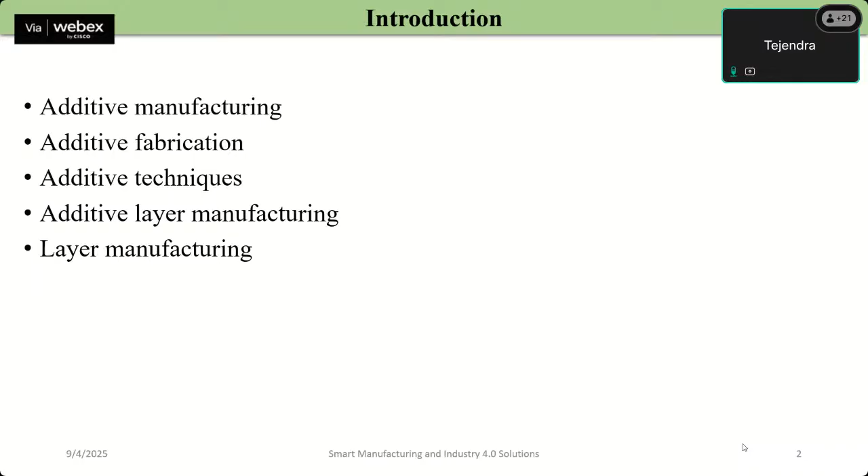Whether we talk about additive manufacturing, additive fabrication, additive techniques, additive layer manufacturing, free form fabrication, rapid prototyping, or 3D printing, these are all different names for the process with a similar principle of operation. Additive manufacturing is a computer-controlled process that creates a three-dimensional object by depositing material, usually layer over layer.

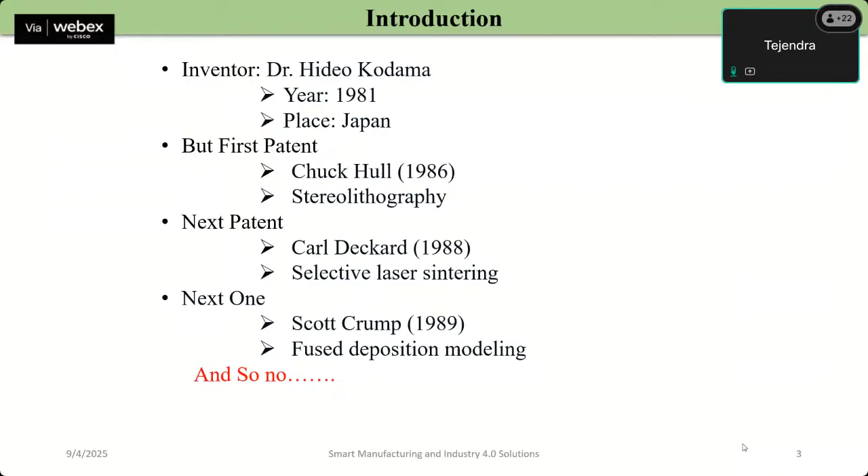A brief introduction about MAM, or metal additive manufacturing. It was first used in 1981 by Dr. Hideo, who is named as the inventor of the process, but the first patent was done by Chuck Hull in 1986 on stereolithography. The next patent was for selective laser sintering by Carl Deckard, and so on.

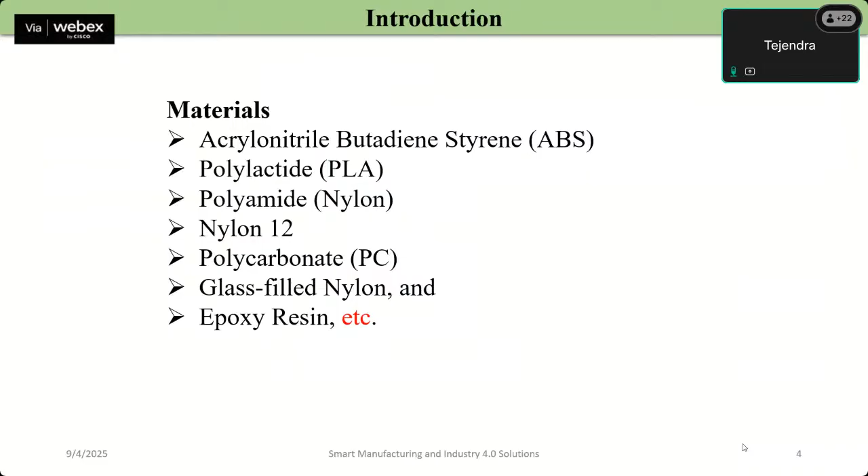When we talk about basic additive manufacturing techniques, the first thing that comes to mind is the material. Most of the material is polymer based, so the material could be ABS, PLA, nylon, epoxy, or resins. Different processes use different types of material, but mainly all the material is nylon based or polymer based.

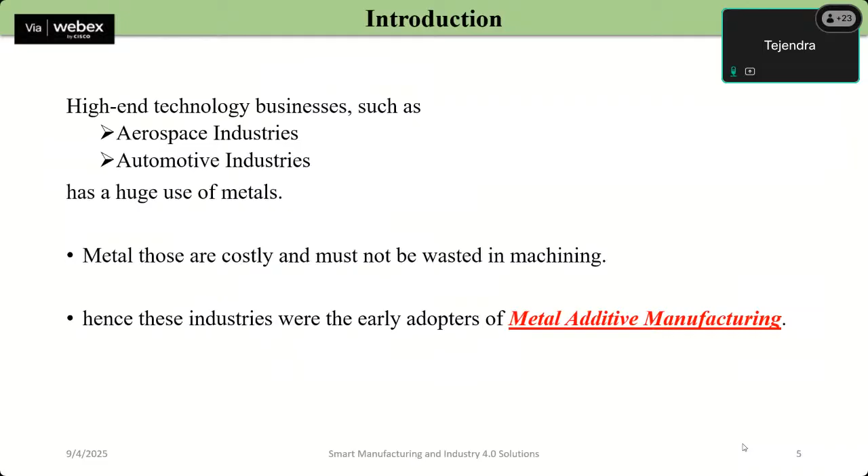But as we talk about mechanical industries, high-end technology businesses, whether the automobile sector or the aerospace sector, these use a large amount of metal. So it is not right to use additive manufacturing only for polymers, as these metals used by aerospace, marine, energy, or automotive industries are costly and must not be wasted in machining or subtractive manufacturing. Hence, these industries were the early adopters of metal additive manufacturing.

Basically, metal additive manufacturing uses metals to create a layer-by-layer object. The production of the consolidated part can be done with reduced labor or weight. Overall, a more efficient part with increased complexity can be made, a part that is not supposed to be made, or is very hard to make, with subtractive manufacturing. The consistency and repeatability are advantages of additive manufacturing processes.

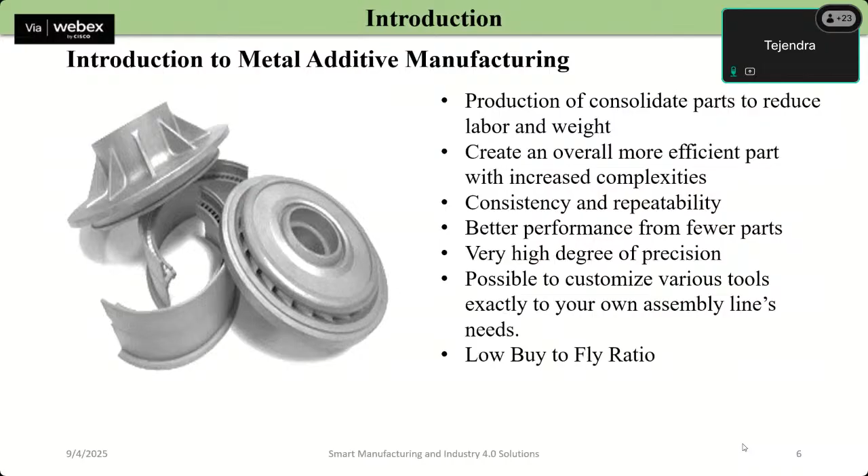Whether we talk about metal or polymer, there is better performance with fewer parts. We can develop an object or a product with a fewer number of parts. A very high degree of precision can be gotten from additive manufacturing, and also a low buy-to-fly ratio. So for my presentation, I have classified the metal additive manufacturing process into two types.

The beam based process and the arc based process. In the beam based process, the heat sources are the laser or the electron beam, while in the arc based process, the arc is the main source of heat, either from the GMAW process, GTAW process, or plasma process. The feedstock used in beam based processes is wire as well as powder, while the arc based process uses only wire as its feedstock.

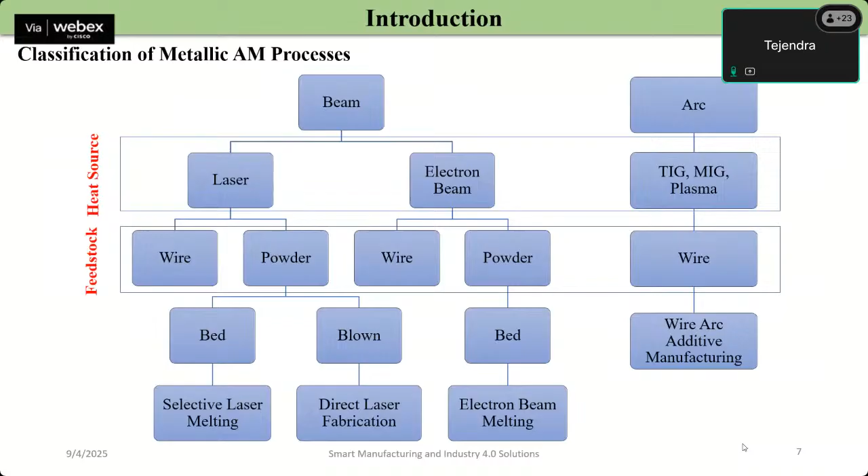Best near net shape can be availed among all the other additive manufacturing processes, and above all, workpiece properties like reflection or absorption do not create any problem.

But there is some disadvantage also, as the electron beam additive manufacturing process needs a vacuum chamber, as a vacuum is needed for the traveling of the electron. So the vacuum chamber cost is quite high and the product size could be limited because of the size of the vacuum chamber.

It has a lower setup cost compared to the electron beam additive manufacturing process, and no size limit, because there is no vacuum chamber required. The work area can be as big as the movement of the robot arm or the laser beam. But it also has some disadvantages, like a low deposition rate.

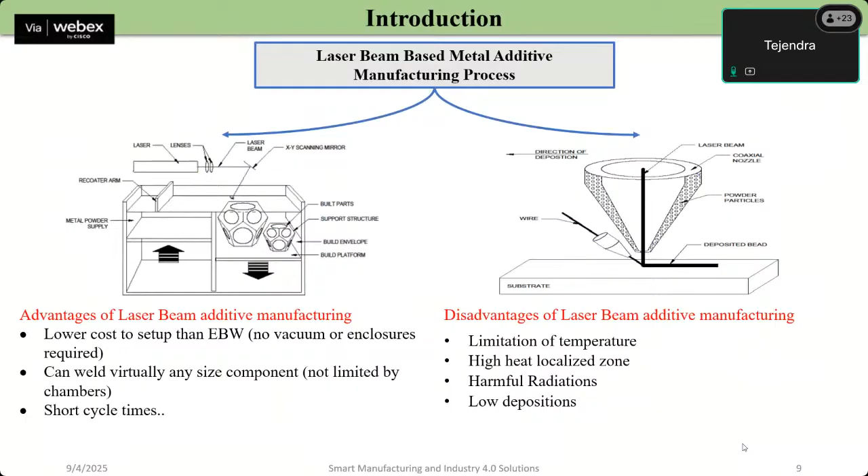So the heat of the electrical arc serves to locally melt the base material as well as to melt the wire filler metal that is being fed into the weld.

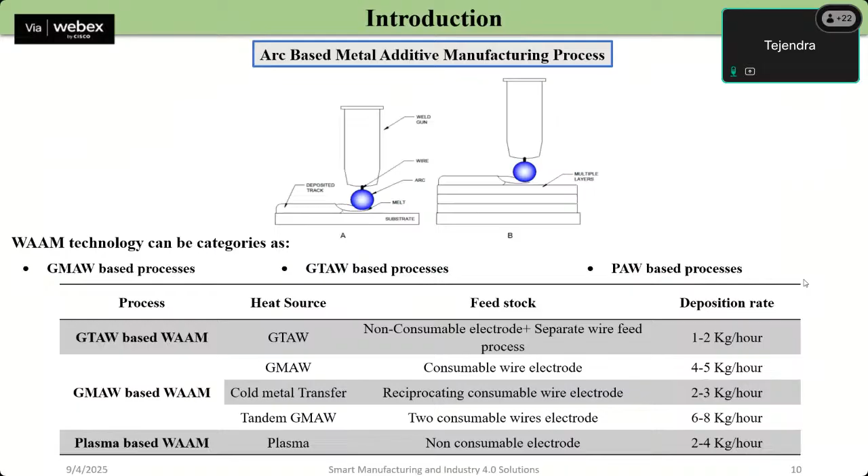Coming back to our topic of sustainability in wire arc additive manufacturing. In this slide, we are going to study sustainability and how it affects or creates any difference in the wire arc additive manufacturing process.

As we know, manufacturing has always been judged on the basis of cost, quality, or productivity. But nowadays, in the present scenario, the fourth dimension, sustainability, has become equally important, as industries worldwide are under pressure to reduce carbon emissions generated in their processes, to conserve resources, or to adopt greener processes.

So WAAM, which is an additive manufacturing process based upon arc welding, is attracting attention not only because it is able to make large or complex parts, but also because it has the potential to make manufacturing more sustainable.

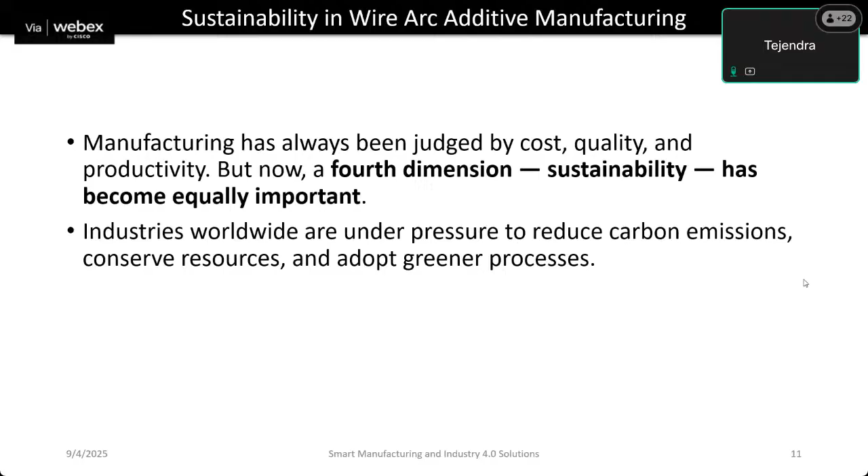We will explore how WAM helps in material saving, energy efficiency, repair or recycling of damaged products, and how we can reduce environmental impact. We will also look at its challenges and innovations in this lecture, so we can make it more sustainable. By the end of the session, I hope you will all be able to see WAM not just as a manufacturing technology, but as a contributor to the global push for sustainability.

Before we dive into WAM, let us understand what sustainability is. The most widely accepted definition of sustainability is: meeting the needs of the present without compromising the ability of future generations to meet their own needs.

Sustainability rests on three pillars: environmental sustainability, economic sustainability, and social sustainability. For environmental sustainability, the resources we obtain from the environment, and the adverse output we provide to the environment, can be considered, like reducing material waste, lowering emissions, saving energy, or conserving natural resources.

Apart from the environment, economic sustainability is also a part of sustainability, as here we need to ensure that the process remains cost effective as well as competitive while being eco friendly. We cannot compromise with harmful or damageable things if we are having some profit in the monetary form.

The third pillar of sustainability is social sustainability, through which we can create safe or meaningful jobs or opportunities for people, so that society can get benefited with the technology. We need to ensure that social sustainability should be there when economic sustainability is there, but because of these two, we should not hamper or compromise with environmental sustainability. So this is the basic introduction of sustainability.

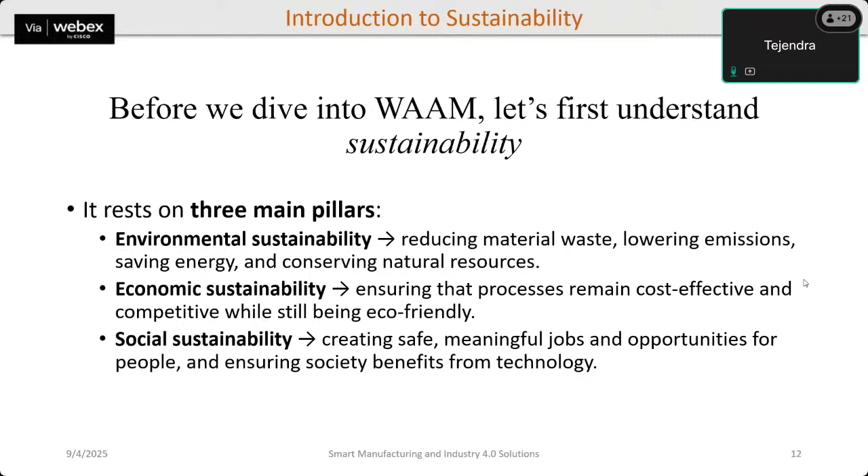So our next slide shows additive manufacturing and sustainability, how additive manufacturing can be sustainable, or what steps we can take to make our additive manufacturing process sustainable.

Unlike subtractive manufacturing, where we cut material away from a bulk or large block, additive manufacturing builds parts layer by layer. This approach immediately improves sustainability because it uses only the material that is needed, resulting in less material use and less waste, as well as enabling lightweight or optimized designs which are not possible with conventional machining.

For example, if we take the case of the aerospace industry, lighter components mean less fuel will be consumed and lower emissions will be there.

Apart from lightweight or optimized design, another key advantage is repair and remanufacturing. With additive manufacturing, instead of discarding a damaged part, we can add material back where it is needed, extending the life of the component, as well as reducing the need for new raw material extraction from the earth.

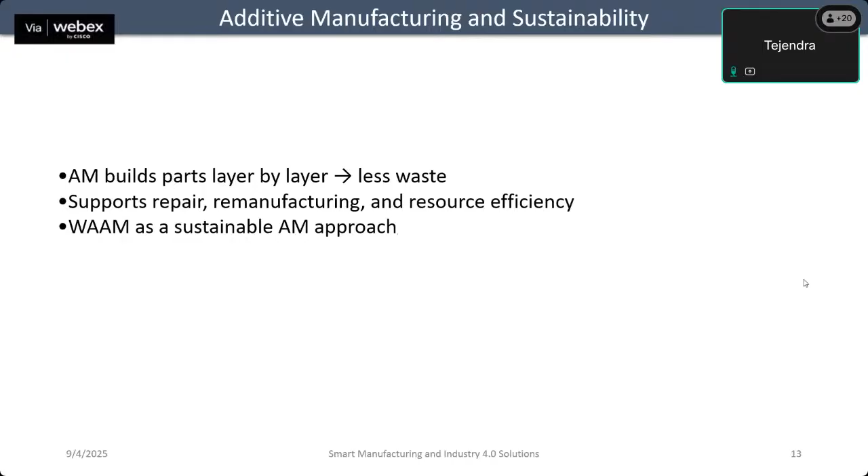So when we proceed further in our presentation, how does WAM connect to sustainability? There are five main dimensions that we need to analyze when we are analyzing sustainability in WAM. The first one is material efficiency.

WAAM uses the wire feedstock with almost no waste. Unlike machining, where most of the material ends up as chip, WAM deposits only what is required and where it is required.

The second dimension could be energy efficiency. WAM consumes less energy than laser or electron beam additive manufacturing processes, since it does not require a vacuum chamber or extremely high power lasers.

The life cycle impact is also a dimension for sustainability in WAM, as one of the biggest sustainable advantages is that WAM can be used for repair and remanufacturing. Hence, instead of throwing away a worn or damaged part, we can rebuild the damaged area and extend its life cycle, generating a good impact on the environment because we are reducing waste as well as reducing the extraction of new raw material from the earth.

The environmental benefits are also there, like reduced CO2 emissions and less transportation, because WAM can be done near the point of use where we are going to use the product. As well, less waste contributes to a smaller carbon footprint, since generating less waste means a smaller amount of waste is created for the environment.

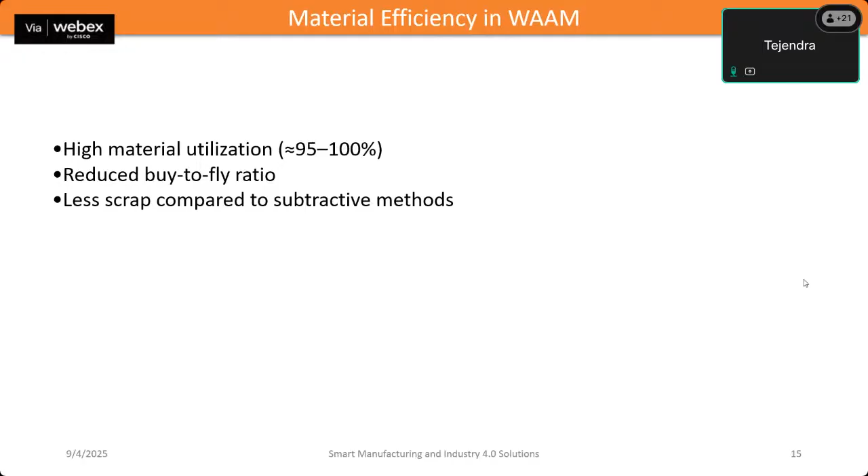Apart from material efficiency, another thing we need to discuss is energy efficiency in WAAM. Many additive manufacturing processes, like laser powder bed fusion or electron beam based additive manufacturing, require very high energy beams and also need special environments like vacuum chambers or controlled atmosphere.

These setups also consume a lot of electricity, not only for melting but also for maintaining the operating conditions, like the vacuum chamber or controlled environment. WAAM, in contrast, uses a conventional arc welding power source that does not require much energy compared to other processes. The energy requirement is significantly low.

There is no need for a large vacuum chamber, expensive laser optics, or different types of controlled environments. For example, if we compare production of the same large titanium part by machining versus VAM, machining not only wastes material but also consumes high energy for cutting and cooling, while VAM deposits only the required material and consumes less power overall, making it a far more energy efficient system.

So in terms of sustainability, VAM reduces the carbon footprint per part by consuming less energy and enabling a near-net-shape manufacturing process.

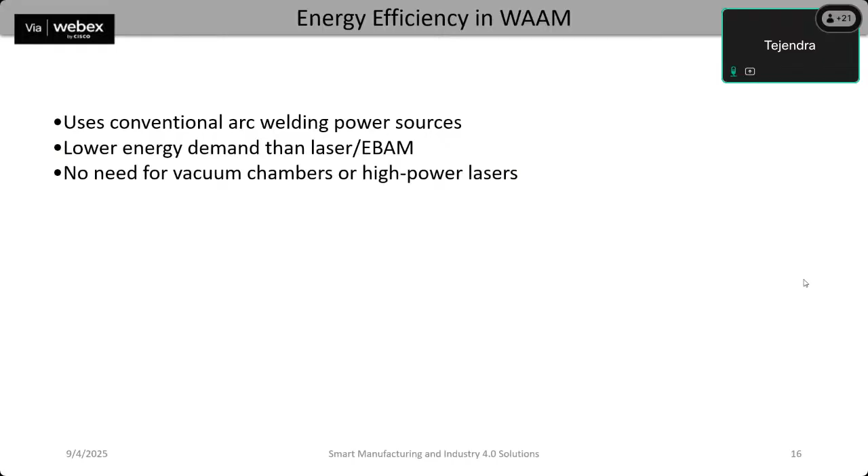When we talk about energy efficiency and the recycling or remanufacturing of the product, the life cycle impact of WAAM should also be considered, as this is another critical sustainability dimension which impacts the product life cycle.

In conventional industries, most of the industries in India still use conventional technology to prepare parts or manufacture components. When a part is damaged or worn out, it is usually scrapped or replaced with a new one. That means more raw material has to be mined and processed, transportation of material is needed, and the manufacturing or casting process adds further steps, all of which increase the environmental impact.

When we compare WAAM to conventional or subtractive manufacturing processes, VAM provides a better alternative. It can be used for repair and remanufacturing instead of discarding a damaged part. VAM allows us to add new material only where it is needed.

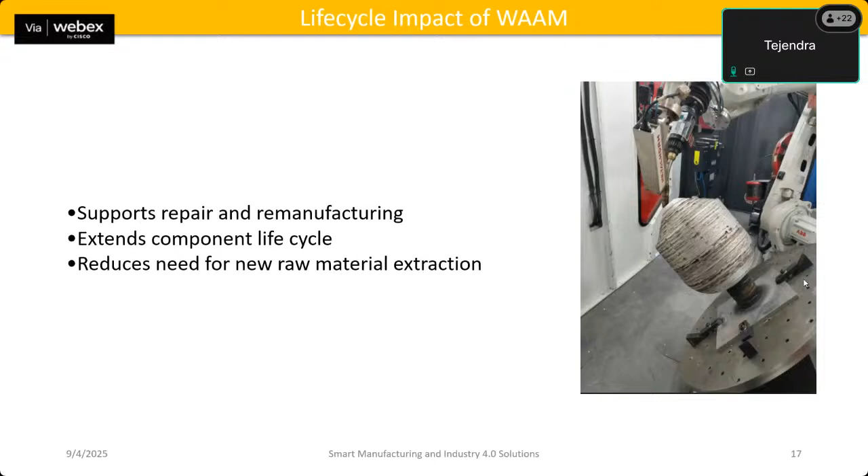So when we talk about material efficiency, energy efficiency, and repair and remanufacturing so that new raw material can be saved, what type of environmental benefits can WAAM provide us?

First, because WAAM uses a near-net shape manufacturing process with very little waste, the overall carbon footprint per part is reduced. If we waste less material, it also means less energy is spent on mining, refining, or recycling.

Secondly, WAAM enables localized production. Imagine you are on an offshore oil rig or in a remote defense base, somewhere in Kargil or Bikaner, where it is very difficult to transport large spare parts. Parts are expensive, and transportation is also expensive and creates a huge carbon footprint by using diesel or petrol in vehicles.

With WAAM, you can carry the wire feedstock and a portable WAAM system and produce a part on site. This reduces the logistics and emissions from transportation.

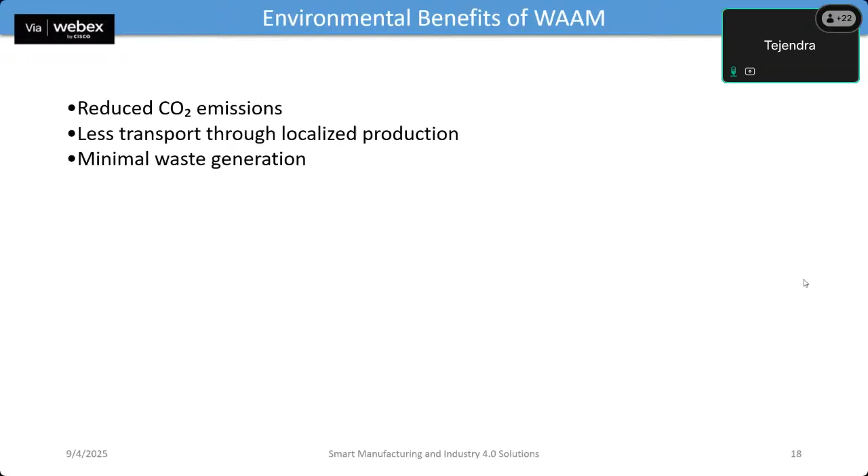Also, WAAM generates minimum waste as compared to machining. With traditional subtractive manufacturing, a large percentage of material ends up as chips, which need further recycling, so WAAM almost eliminates this problem. I'm not saying WAAM is 100% accurate, but the need for post-processing is only very little.

Now let's look at the economic impact of WAAM, which is closely linked to sustainability. First, WAAM offers low cost production because of its high material utilization. Almost all the wire fed into the process becomes part of the component. That is a huge cost saving compared to machining, where expensive materials like titanium or Inconel can have up to 80 to 90% wastage.

Second, WAAM enables shorter lead time. Traditional manufacturing of large metal parts often requires casting, forging, or extensive machining, all these different processes together, which can take months. WAAM builds the part layer by layer directly from a CAD model, cutting down the production time or the dwell time.

Also, WAAM supports localized production, meaning the part can be built close to where it is needed. This reduces dependency on the global supply chain, avoids long shipping delays, and even creates new job opportunities in local workshops and repair systems.

So economically speaking, WAAM is not only cheaper but also faster and more resilient, all while supporting sustainable development.

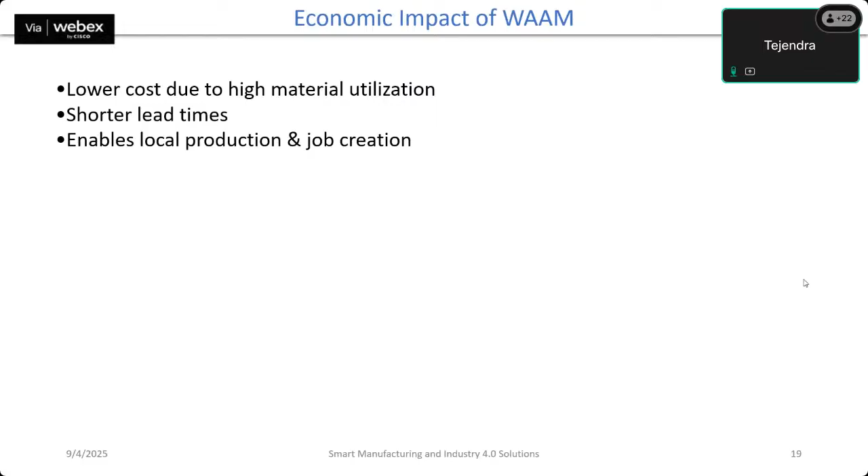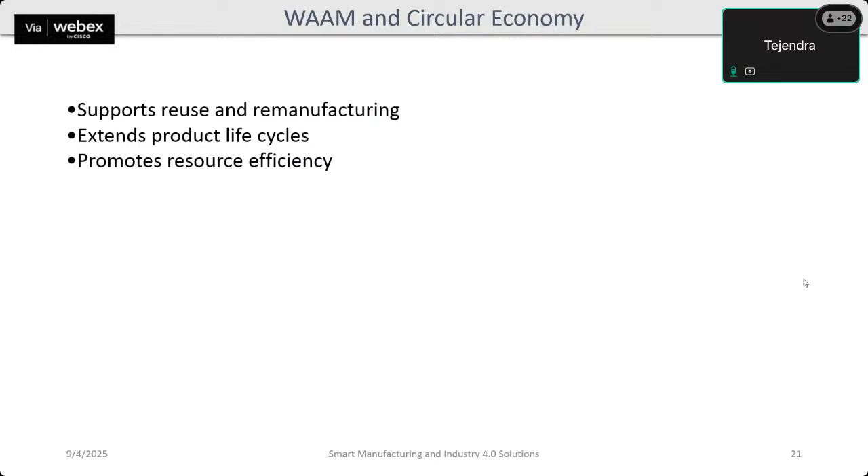Up to now we have focused on the sustainability advantages of WAAM, but it's also important to look at the challenges that still need to be solved, like high heat input. Since WAAM is based on arc welding and the process generates a lot of heat, this can lead to residual stresses, distortion, or defects in the build part. That means extra machining or heat treatment may be required, which consumes more energy and reduces sustainability.

Another challenge could be surface finish. WAAM parts typically have a rough surface and large layer height, meaning post-processing like machining, grinding, or polishing is necessary to achieve the required finish and tolerance. Again, this adds cost and energy consumption to the process.

Energy efficiency depends upon process control. If the process is not optimized, for example with the wrong deposition pattern or too many reruns, energy efficiency can be lost. Proper monitoring and control are very essential.

The last challenge is limited automation and monitoring. Unlike laser bed additive manufacturing, WAAM still lacks widespread adoption of advanced sensors, AI, or closed loop control systems. Without these, the sustainable potential cannot be fully realized.

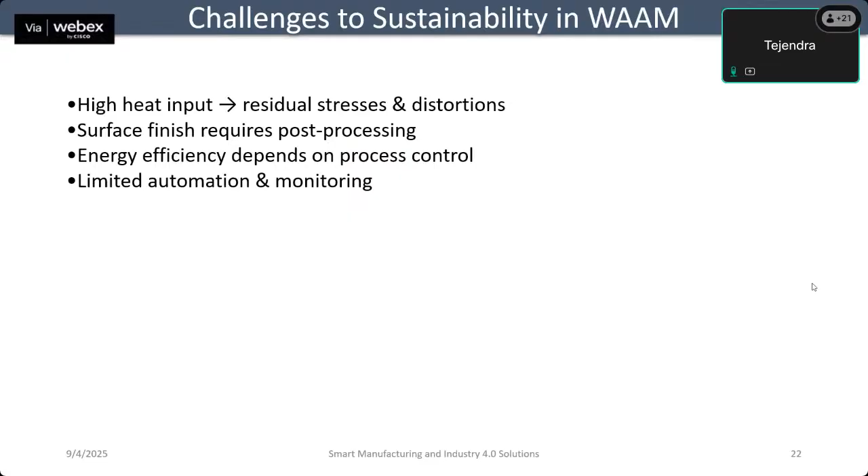To overcome the challenges discussed previously, researchers and industries are working on advancements to make WAAM more sustainable. This includes process monitoring or closed loop control. With different types of sensors and cameras, such as thermal imaging or high speed cameras, or AI based control, the WAAM can adjust parameters in real time to maintain stable deposition, reduce defects, and save both material and energy.

Hybrid WAAM and machining systems can also be used. Instead of doing all the machining after the part is fully built, some machine tools can combine with the WAAM in the same setup. This way, the part is machined immediately after deposition, improving accuracy and reducing extra post processing time.

Wire preheating or advanced torch design can be used, including water cooled torches or preheated wire, which improves efficiency by reducing heat input problems, stabilizing the arc, and enhancing deposition quality. This directly reduces energy consumption and improves material properties.

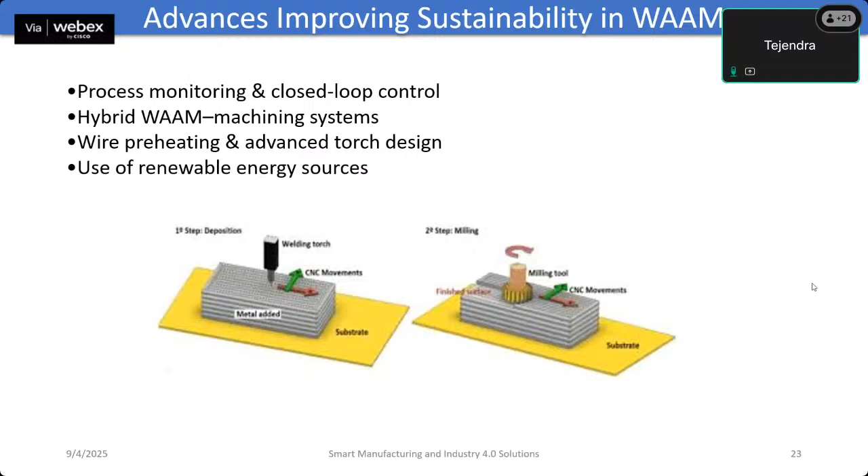We are taking an example of aerospace. Aerospace companies are under huge pressure to meet sustainability and net zero emission goals, and WAAM plays a key role in helping them achieve lighter aircraft. WAAM enables near to net shape and optimized design, meaning less material is used and overall aircraft weight is reduced. A lighter plane consumes less fuel, producing fewer CO2 emissions over its lifetime.

Also, reducing titanium waste, as titanium material is used in very large quantities in the aerospace domain. Machining of titanium parts can waste up to 80 to 90% of the block material, as we initially discussed. WAAM uses almost 100% of the wire feedstock, saving both cost and energy in raw material production.

Also, WAAM allows aerospace companies to print parts when and where they are needed. This shortens supply chains, reduces transport related emissions, and cuts down storage costs.

By reducing material waste, improving energy efficiency, and lowering emissions, WAAM aligns with the net zero roadmap of aerospace giants like Airbus, Boeing, or Rolls Royce. So WAAM is not just a manufacturing technique; it becomes a strategic tool for aerospace industries to achieve their long-term sustainability targets.

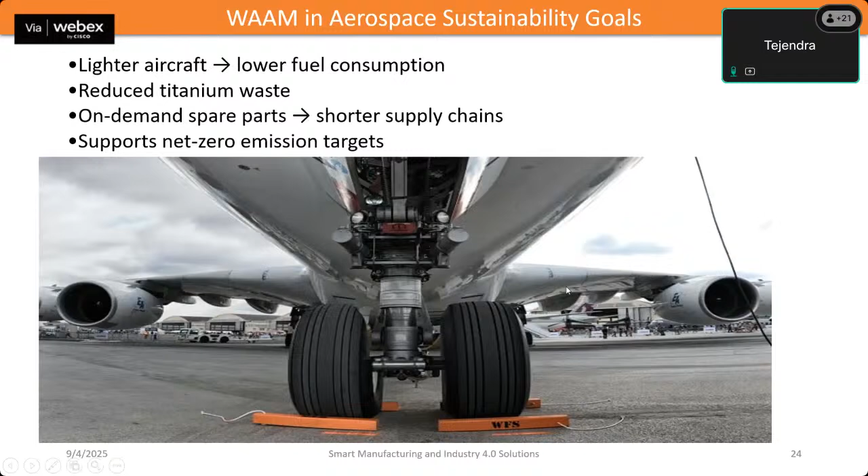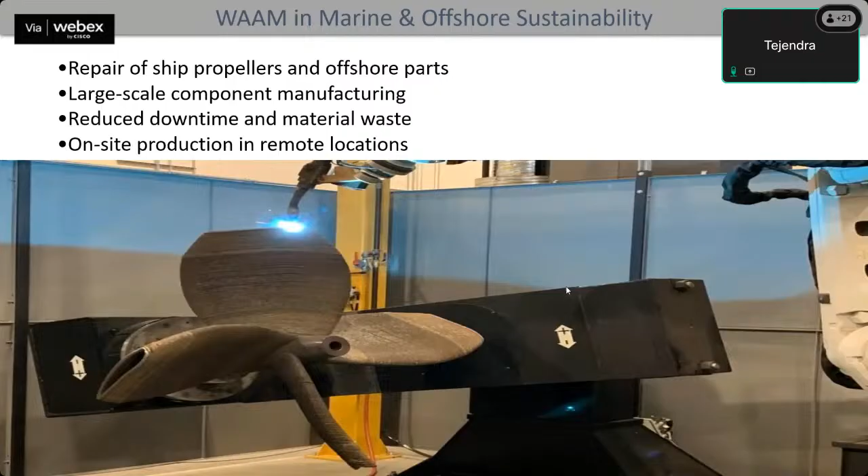It also reduces downtime and material waste. For example, if a ship has a damaged propeller, instead of waiting for a replacement, we can repair the propeller with the help of WAAM. On-site production can help in oil rigs, marine repair yards, or various defense bases, where a portable WAAM system could be used to build or repair the required part, which is also beneficial as it reduces emissions.

So after the aerospace, oil, or marine industries, we can also use the WAAM process in the automotive or tooling industries. As the traditional die involves heavy machinery or a long lead time, WAAM can reduce these things. The repairing that we have discussed again and again, that we can do through WAAM, includes rebuilding, remanufacturing, or extending the tool life.

Lightweight structural components for aerospace or automotive can be built by WAAM, which will decrease fuel consumption, and when fuel consumption is decreased, emissions will also be reduced. WAAM helps by enabling optimized geometries with less material waste in this domain.

Also, the development cycle for a particular part or object can be reduced, as WAAM can quickly produce prototypes for new designs. So in the automotive or tooling domain, by reducing waste, extending tool life, lowering cost, or enabling faster innovation, WAAM contributes on a large scale.

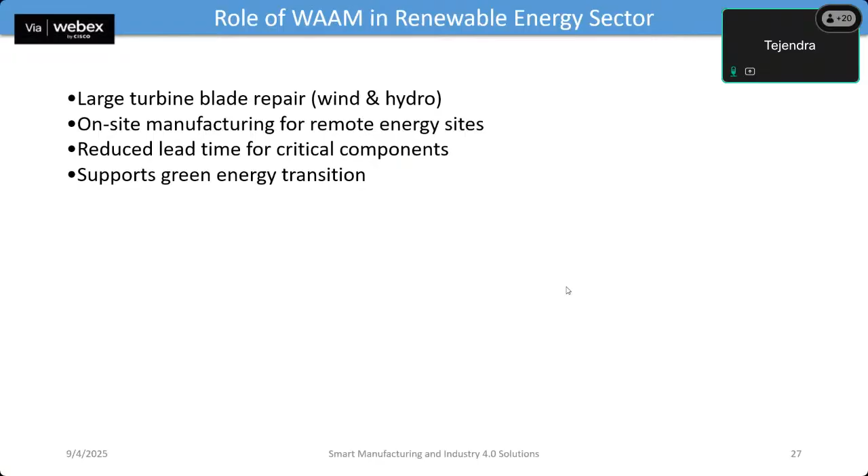Also, for sustainability through WAAM, the reduction of greenhouse gases in the environment is a very significant point to discuss. The wastage through traditional manufacturing can be reduced in a very large amount, so we can deposit only when needed, reducing transportation through on-site production.

Energy efficiency with optimized deposition, as compared to large-size forging or casting processes where a large amount of machining is required after the process. The WAAM system can increase energy efficiency with AI and automation as well.

So it also supports the circular economy and net zero goals by enabling the repair, reuse, or recycling of metal parts. WAAM helps industries reduce their total carbon footprint and align with the net zero emission targets set by the government or global climate agreements.

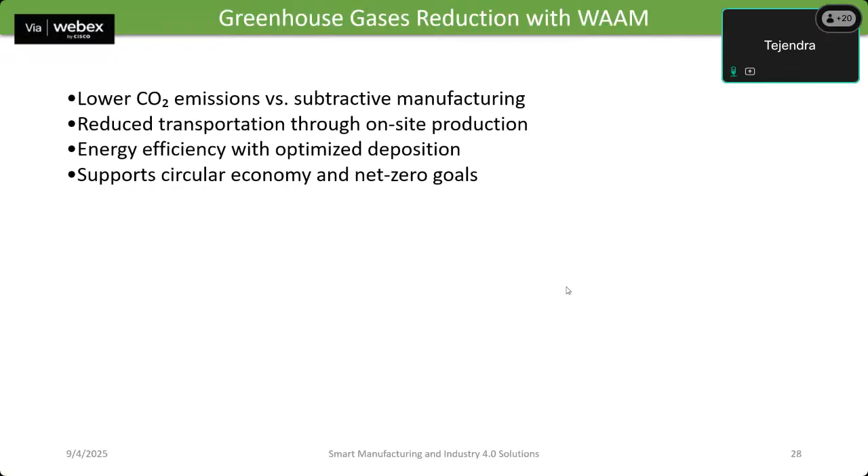So when we talk about the circular economy, which is all about keeping resources in use for a longer duration of time, or for as long as possible, through reduced waste, the circular economy can be achieved with minimum scrap, or keeping the material in circulation instead of sending it to wastage.

The repair and remanufacturing of parts, discussed in the previous slides many times, will also support the circular economy. Recycling of unused feedstock, like metal wires or powder not consumed in the build, can often be reused in the next job. We can collect the powder, filter it, reprocess it, and use it again and again if using any powder-based metal additive manufacturing system.

And of course, by enabling repairs, we are extending the component life cycle. A longer life cycle means less frequent replacement, conserving resources and reducing emissions.

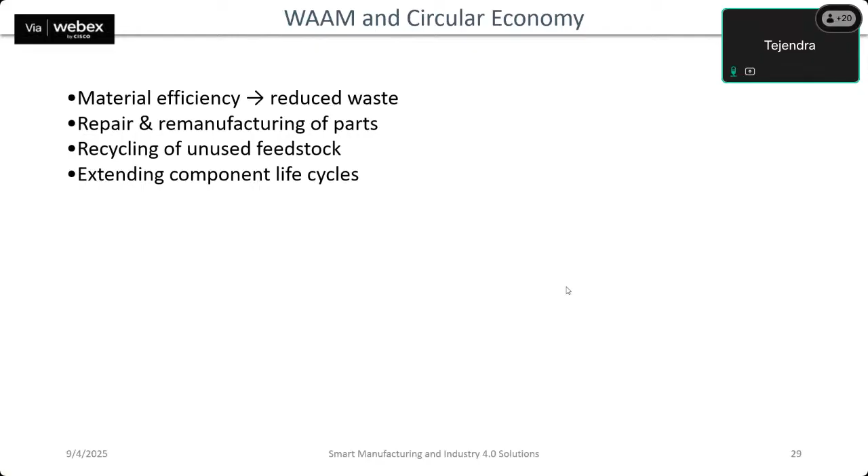So we are done with sustainability in WAAM. Now, if we think about the different side of the coin that WAAM has, it is called smart manufacturing. Through smart manufacturing, we can assure precision, accuracy, and repeatability. For these things, or for energy efficiency too, some advanced mode of manufacturing is required. So what is smart manufacturing?

Everyone might already know about smart manufacturing, but just a brief explanation or discussion on it. Smart manufacturing is a modern approach to production under the Industry 4.0 framework. It is not just about automating the machines, it's about connecting them, making them intelligent, and allowing them to adapt in real time.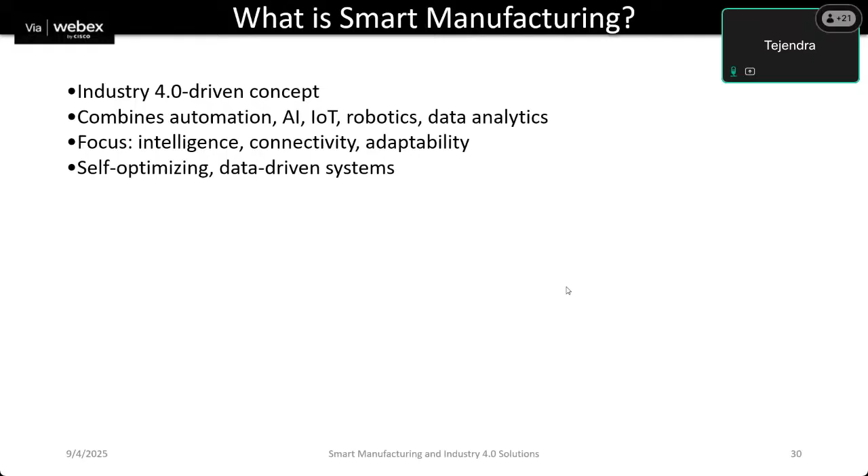If we talk in simple terms, smart manufacturing integrates technologies like artificial intelligence, IoT, robotics, or data analytics into the manufacturing process. The main aim is to create a system that is not only automated, but also self-optimizing. That means a process that learns from data, responds instantly to changes, and makes decisions without needing human intervention. So instead of trial and error manufacturing, we can have intelligent or data-driven production that ensures high efficiency, good quality, as well as high consistency.

So why is smart manufacturing required in WAAM? WAAM is a powerful technique, but it has some challenges. For example, controlling heat is very difficult, and if you don't manage it properly, it leads to residual stresses, distortion, cracks, or many other defects. So surface finish and dimensional accuracy are also a big concern for researchers and industries using WAAM.

This is where smart manufacturing becomes very critical, as by integrating sensors, IoT, or AI, we can make WAAM a more reliable and repeatable process. Smart systems allow us to monitor parameters in real time and make adjustments instantaneously, rather than relying on post-process corrections. Another key point is that WAAM has shown great results in research labs, but scaling it up for industry requires more stability and consistency.

Smart manufacturing bridges this gap and makes WAAM suitable for aerospace, marine, and energy applications where quality cannot be compromised.

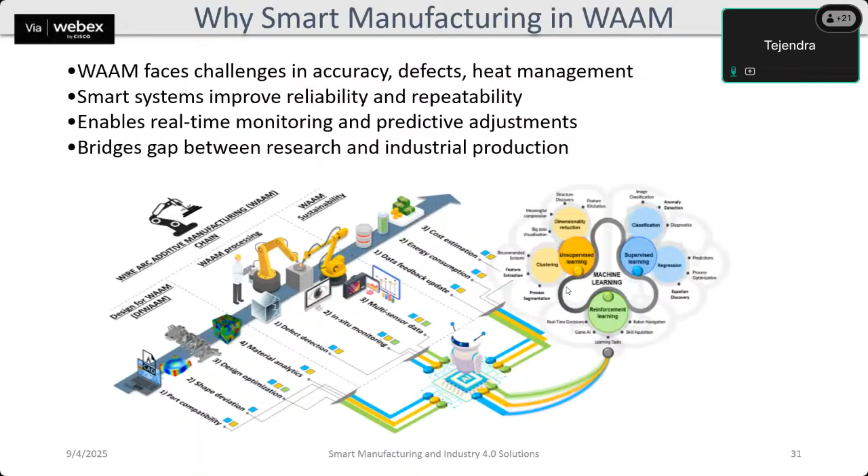So this is a basic layout of the smart manufacturing system that can be used in WAAM, where the designing or processing of WAAM, as well as the sustainability dimension or sustainability points, can be used and monitored, or analyzed through the AI model.

So what could be the role of smart manufacturing in WAAM?

So after understanding the challenges, the first role is real-time data acquisition, which with the help of sensors like thermal cameras, current or voltage sensors, or laser profilometers, allows us to continuously monitor the process. This allows us to know exactly what is happening during the deposition.

Second is closed loop feedback control. Instead of waiting until the part is finished, the system can make adjustments instantaneously, like changing the wire feed speed or torch travel, so that the bead shape or quality remains consistent throughout.

Artificial intelligence can also help in predictive defect detection. By analyzing past process data, AI can forecast when and where porosity, cracks, or distortion can occur, and can alter and adjust before they actually happen.

Also, robotics can be used for automation, to make WAAM scalable. With a robotic arm handling the torch and multi-axis motion, complex geometries can be produced reliably with very less dependency on manual intervention.

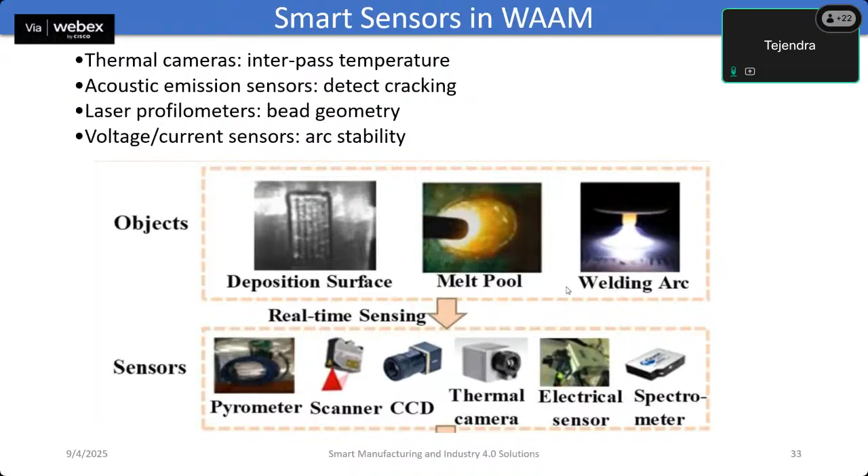IoT is also a very key player in smart manufacturing. If we're talking about WAAM, when we talk about sensors or data, it's about connectivity, and this is where the Internet of Things can play a role.

First, IoT enables machine connectivity or communication. The WAAM machines, robotic arms, or sensors can talk to each other and exchange data seamlessly with the help of IoT. Secondly, it also allows remote monitoring or diagnosis. Engineers don't always need to be near the machine. They can monitor process parameters like temperature, voltage, or other factors that could cause defects or differences in the outcome, even across the globe.

Also, IoT ensures cloud storage of the build data. Every layer's information can be uploaded and stored, creating a complete digital history of the component. This is vital for traceability, especially in industries like aerospace, where certification requires detailed recordings. IoT can also support distributed WAAM cells, meaning factories in different locations can be connected and synchronized, allowing the global manufacturing network to work together efficiently.

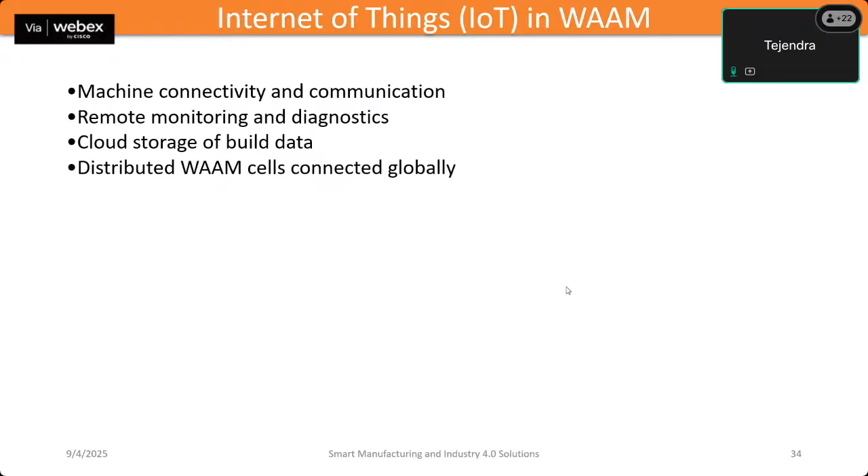When we talk about sensors and IoT, artificial intelligence is also a powerful tool used in smart wire arc additive manufacturing systems. First, machine learning algorithms can analyze past build data and learn the patterns that lead to defects such as porosity or cracks. By recognizing these patterns, AI can predict defects before they happen in the running process, in real time.

Secondly, AI can tune process parameters in real time. For example, it can automatically adjust the voltage, wire feed speed, or torch travel speed to maintain stable deposition and consistent bead morphology.

Also, computer vision systems use cameras to inspect the surface quality of each layer. They can detect irregularities like roughness or incomplete fusion, immediately avoiding build failure. Neural networks can also be trained to develop optimized build strategies. Instead of trial and error experimentation, AI can suggest the best combination of parameters for a specific material, geometry, or application.

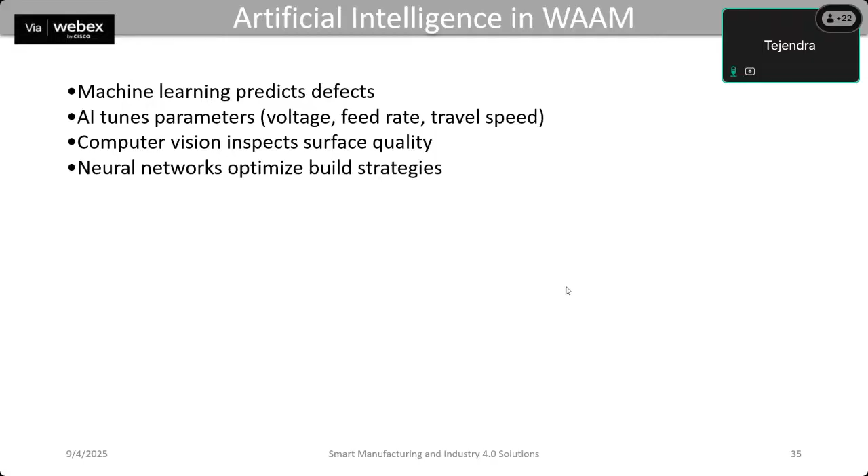Digital twin technology could be another key element of smart manufacturing applied to WAAM. A digital twin is essentially a virtual replica of the actual WAAM process. It allows engineers to simulate heat transfer during deposition, predicting how heat will accumulate and where residual stresses might form.

This is important because too much heat can cause distortion or cracking. The digital twin also helps in predicting mechanical stress, distortion, or even microstructural evolution, or any correction required in the microstructure. We can know in advance what kind of grain structure or mechanical properties will result from a certain process path. The digital twin is also very important for tool path planning, as instead of experimenting on the machine, we can optimize the path of the robotic torch virtually to minimize defects as well as distortion.

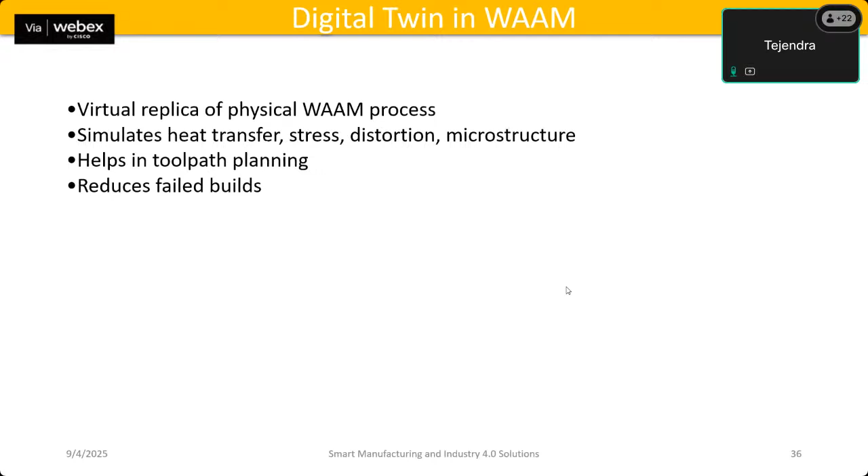The biggest benefit is that it reduces failed builds. Since we already know how the process will behave, we can save both material and time by reducing trial and error in the process. The digital twin basically acts as a testing ground where mistakes can be made virtually, not physically, making wire arc additive manufacturing the most cost effective as well as the most reliable process.

As we are using sensors for real-time applications, a closed loop feedback system is very essential. Closed loop control is the most important aspect of smart manufacturing. In simple words, the system is continuously monitored and automatically corrected in real time. With the help of the outcome we generate, we can easily alter the process parameters, and through this any defects that arise can be eliminated. For example, if the bead height becomes too tall or too short, the system immediately adjusts the wire feed speed or travel speed to bring it back to the desired level.

Suppose if the arc voltage becomes unstable, the controller can fine tune it to ensure stable energy input. Similarly, the torch movement can be corrected if the deposited path deviates from its original trajectory. Also, it has the biggest advantage that consistency is maintained throughout the build.

Instead of discovering defects at the end of the process, the closed loop control system prevents them during the process. So the closed loop control system or closed loop feedback system transforms WAAM from a semi-manual or error-prone process into a highly controlled self-correcting system, just like modern CNC machines achieve precision through continuous feedback.

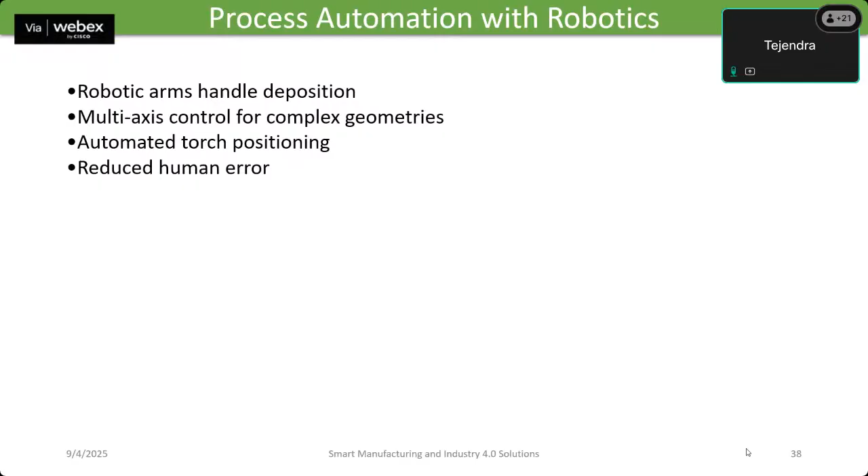WAAM generates a massive amount of data during each build. Parameters like voltage, current, wire feed rate, temperature distribution, or outcomes like bead height or cooling rate can be continuously recorded.

This data is not just stored, it can be analyzed to identify trends. For example, by studying the variation in arc current or bead width over time, we can spot early signs of instability in the process.

Through big data analytics, we can also discover defect patterns. If certain combinations of parameters always lead to porosity, the system can avoid these conditions automatically.

Another advantage is predictive maintenance. By monitoring the performance of the torch, wire feeder, or cooling system over the build, data analytics can warn us before a component fails. It reduces downtime and can increase machine availability to us.

So finally, analyzing historical data supports better quality control. It helps in setting tighter process windows, and it can ensure that WAAM parts meet strict industrial standards.

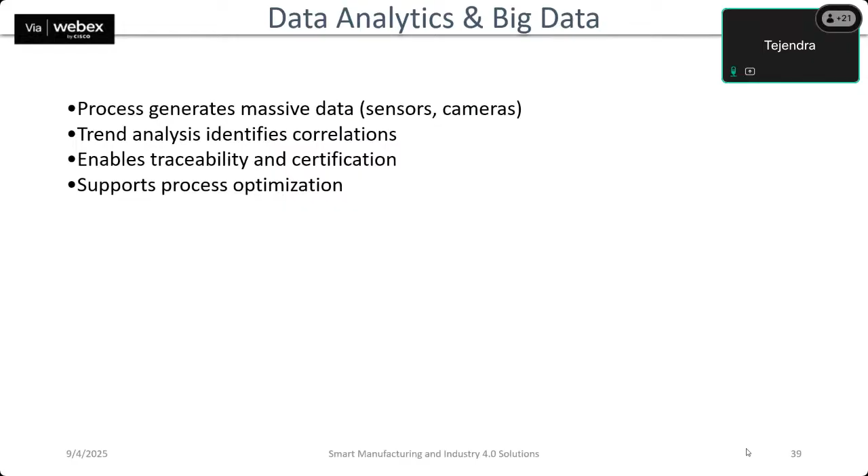Cloud computing or cloud manufacturing could be the major enabler for the smart WAAM process. It shifts manufacturing resources and capabilities into the cloud, making them accessible from anywhere. It allows remote access to WAAM resources.

Engineers or companies don't have to be physically near the machine. They can upload the design, monitor the build, or even control the process through the cloud-based platform. Secondly, digital designs can be shared globally.

A part designed in one country can be directly manufactured in another using the same digital model, which makes WAAM a truly distributed or collaborative technology.

Also, virtual WAAM labs or simulations are possible. Instead of conducting costly physical experiments, simulations can be run in the cloud to test different parameters, predict outcomes, and only then be carried out into the actual build.

Finally, cloud platforms enable on-demand manufacturing services. Companies that don't even own a WAAM system can still use it by accessing manufacturing-as-a-service providers through the cloud.

Predictive quality control could be a game changer in WAAM, as it helps prevent defects rather than just detect them after the complete part has been built. The process works by combining sensors with AI.

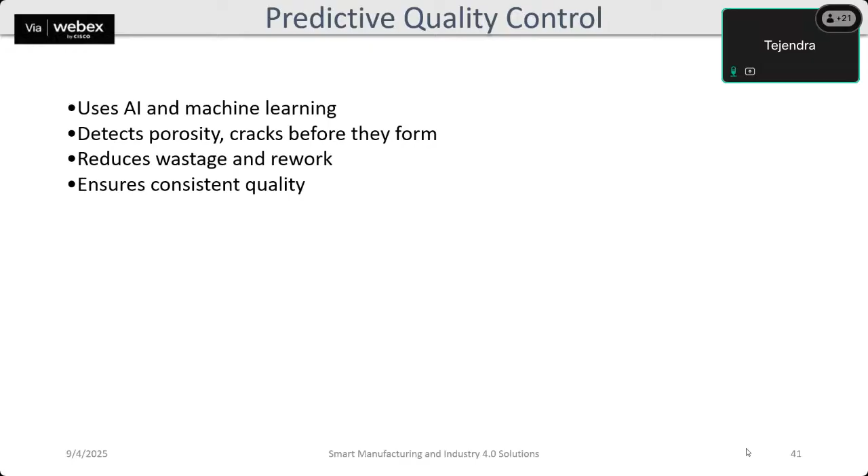As we have already discussed sustainability and smart manufacturing, how can we achieve sustainability through smart manufacturing in WAAM? One of the major advantages of integrating smart manufacturing with WAAM is gaining sustainability in the process. WAAM itself already reduces material waste compared to traditional manufacturing systems. Smart WAAM makes this even better by optimizing the tool path and deposition strategies to minimize excessive material.

Also, smart WAAM enables the recycling of unused wire, supports, and even scrap materials. This contributes to a more circular economy model in manufacturing. Also, distributed manufacturing through WAAM, where parts are printed closer to where they are needed, can significantly reduce transportation-related carbon emissions.

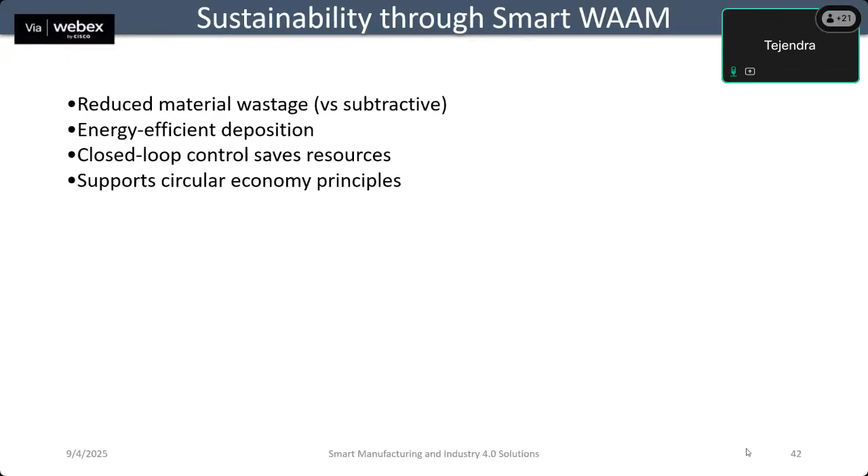For industry case studies, we're taking some industry parts as examples. Aerospace is one of the biggest adopters of the smart WAAM process, because the industry requires lightweight, complex, and high strength components that are very expensive to produce using traditional methods. Smart wire arc manufacturing helps by ensuring defect-free builds with the use of AI, closed loop monitoring, and predictive quality control. The process becomes reliable enough to meet aerospace industry standards.

Digital twin technology is especially valuable in aerospace because before a part is printed, it simulates the heat flow, distortion, and mechanical properties, ensuring the final product meets certification requirements. A well-known example is the production of large titanium structural components, such as wing spars or brackets. Using smart WAAM, these parts are produced faster, with less waste, and at a much lower cost compared to machining them from solid billets. This proves that wire arc manufacturing is not just experimental; it is already being used to manufacture critical aerospace parts.

In the marine or offshore industries, components are often large, heavy, and very expensive to manufacture or replace. WAAM is highly suitable here because it can produce large scale components such as ship propellers, rudders, and even structural elements directly from wire feedstock. Smart WAAM further improves this by enabling real-time monitoring and defect prediction, which is especially important for marine applications where corrosion resistance and mechanical strength are vital.

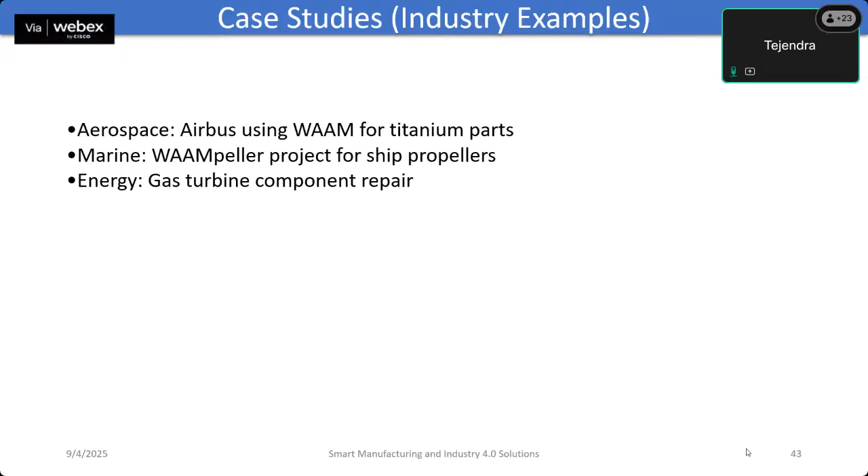A practical example is the customized repairing of a turbine component instead of replacing an entire turbine blade. The damaged portion can be rebuilt layer by layer, restoring the part to its original condition. That saves enormous cost and reduces downtime, so the machine can be brought back to work very soon.

Some of the benefits of smart manufacturing make it more attractive for industries. High accuracy and repeatability: by using sensors, closed loop control, and AI, each layer is deposited consistently, reducing dimensional errors.

Also, smart WAAM enables faster production of large parts. Unlike powder-based 3D printing, WAAM has a high deposition rate, and smart automation makes the process even more efficient, leading to reduced material wastage and cost.

Since wire is used as feedstock and deposition is optimized, the wastage is minimal compared to subtractive machining. Also, the smart wire arc additive manufacturing process provides enhanced quality.

Real-time monitoring and predictive control detect problems even before they occur, ensuring reliable parts suitable for critical industries. Also, smart WAAM contributes to sustainable manufacturing with the use of less energy.

It uses material more effectively and efficiently, with recycling possibilities as well, supporting eco-friendly production models.

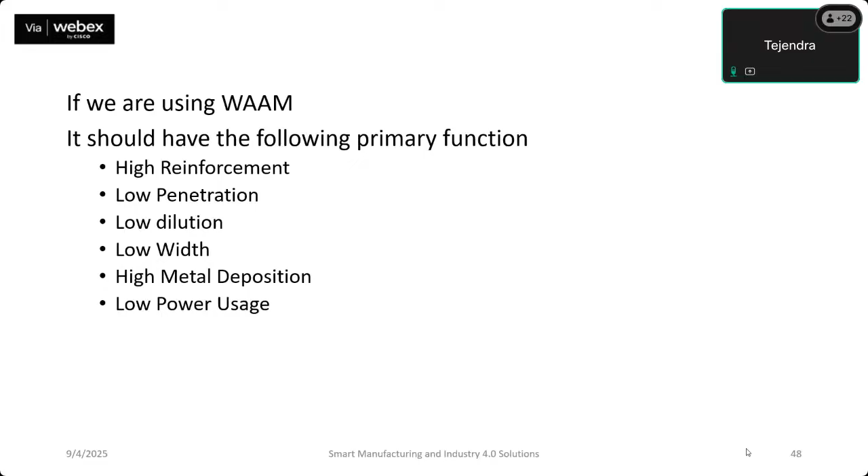Because of this cooling, the conduction of temperature will be fast. More conduction of temperature means lesser temperature accumulation into the generated part. Lesser temperature in the generated part leads to low fluidity of the metal, and low fluidity of the metal results in more reinforcement.

So the first part that we are going to consider is the advanced fluid-cooled welding torch for WAAM. How to prepare the fluid-cooled welding torch for this case study - these are the steps used for the design and development of the fluid-cooled welding torch.

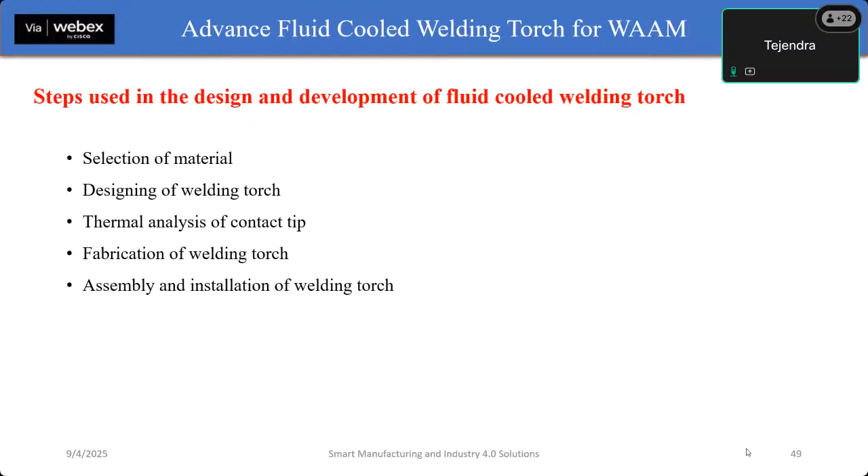Firstly, the selection of material. Secondly, the designing of the welding torch. After the designing of the welding torch, the design of the torch has been fed to ANSYS for the thermal analysis of the contact tip. Once the thermal analysis has been done and the torch has been approved, the fabrication of the welding torch and the assembly and installation of the welding torch onto the WAAM machine follows.

So the first thing is the selection of material for the welding torch. The material selected was copper tellurium. It has good machinability and high thermal and electrical conductivity. For the selection of material, the criteria taken into account were thermal conductivity, electrical conductivity, machinability, and lightweight.

The thermal conductivity should be good, to enhance the heat transfer rate from the contact tip, so that the temperature can be controlled as per our desire.

The electrical conductivity should also be good to transfer the current from the welding wire with the least amount of resistance, to improve the efficiency of the welding power source, as the least resistance will provide us the facility of limited current that can be drawn from the primary welding source.

Also, the machinability, the ease of fabrication should be there, as the design of the torch is complex, and also the lightweightness of the torch, so that it does not create any hindrance in the movement of the robotic arm, or the accuracy of the robotic arm should not get compromised.

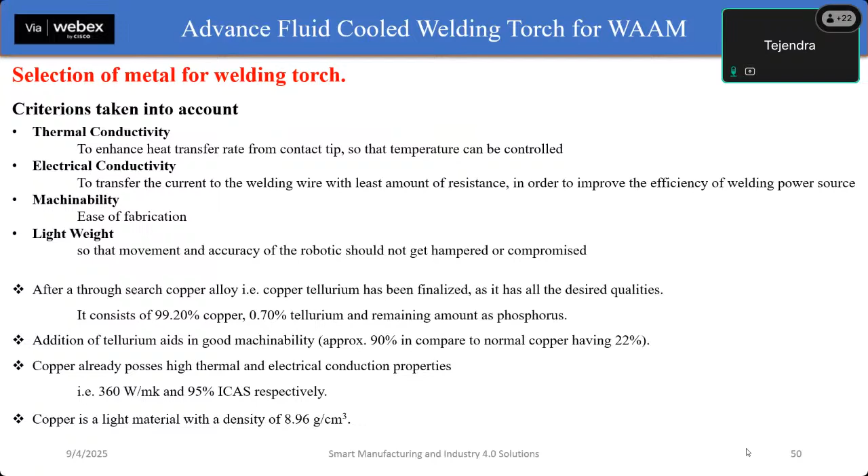So, after thorough research, the material selected was copper tellurium. It consists of 99.2% copper, 0.7% tellurium, and the remaining amount of phosphorus. The tellurium also adds a benefit of good machinability. Copper is also a lightweight material with a density of 8.96 grams per centimeter cube only. Hence, the lightweightness of the component is also there.

So for the geometric parameters, for the selection of maximum dissipation, the number of revolutions, the width of cut, the depth of cut, and the length of the contact tubes were taken. For each parameter, three levels were chosen. The three levels for number of revolutions were 10, 8, and 6. The depth of cut was 4.5 mm, 3 mm, and 1.5 mm. The width of cut was 5 mm, 4 mm, and 3 mm. And the length of contact tube that we tried was 5 inch, 4 inch, and 3 inch.

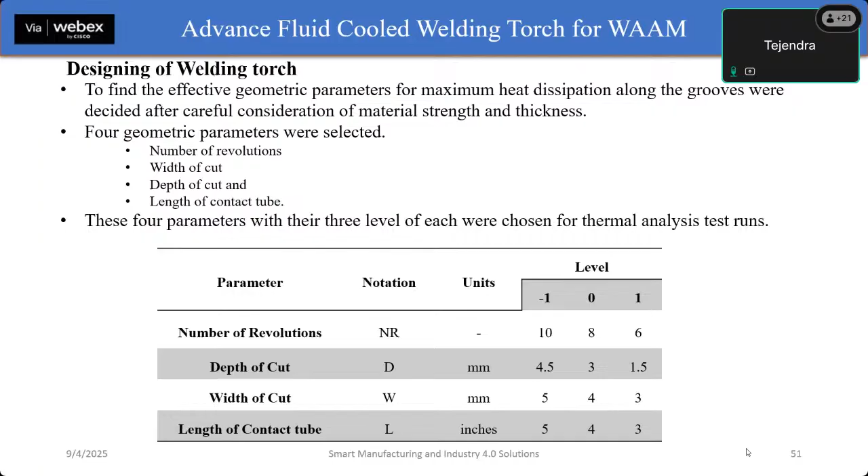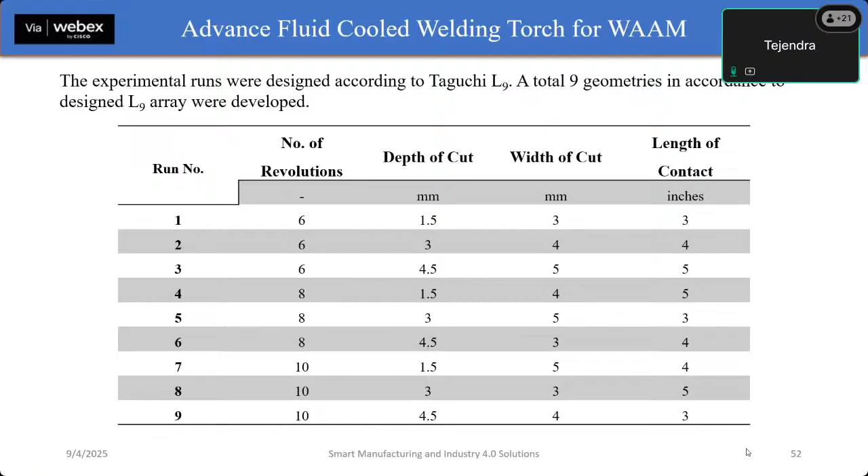The nozzle design has been used in a spiral form to enlarge the surface area, so that the maximum amount of heat conductivity can be achieved.

The analysis in ANSYS was conducted using two cooling modes, air and water. For the air cooling analysis, the outer annular was removed, and it was assumed that the V-grooves were in direct contact with ambient air, allowing for free convection. For the water-cooled analysis, the outer annular was assembled onto the design with the assumption that water was pumped through the jacket, resulting in forced convection. In this case, the V-grooves were in direct contact with the water, which carried away the heat.

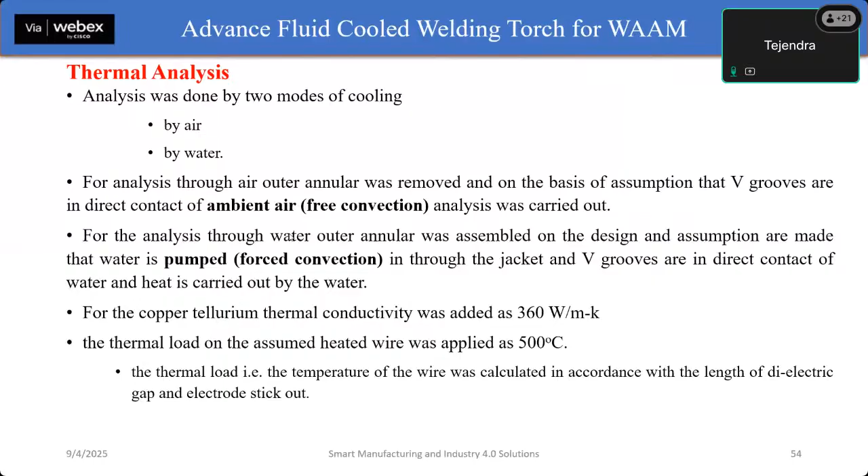So these are the analyzed geometries. These geometries were analyzed on the basis of convection through air, and these are the geometries that we analyzed using water circulation with the outer annular and grooved nozzle.

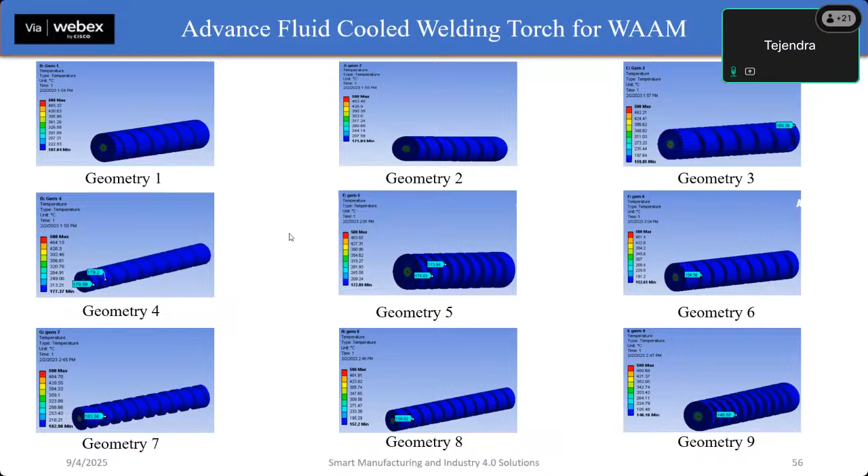So on the basis of the various levels that we decided to prepare the torch, we have done the analysis. The final temperature achieved through air and the final temperature achieved through water were analyzed. The temperature was obviously lesser when water was being circulated for the conduction.

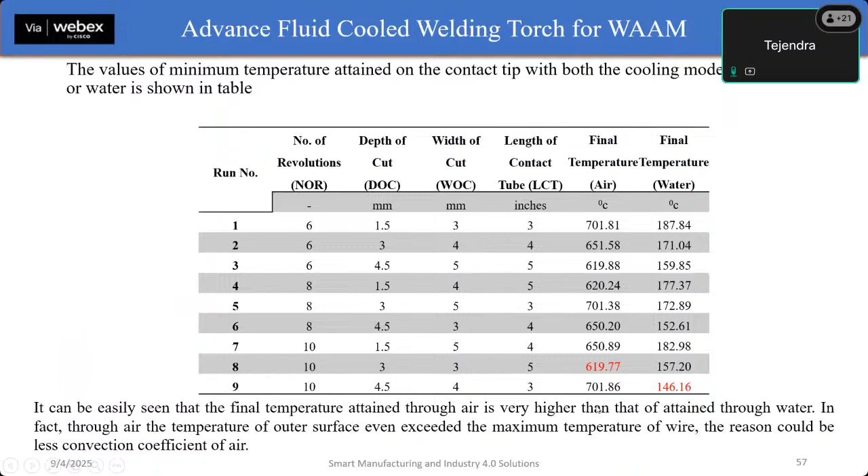So the torch with the lesser amount of temperature has been selected as our fluid cooled welding torch. The advantage of this torch is that the design is compact and can be used in the 3D printing process very easily, and can be used for any general or intrinsic designs.

As the preheating of the wire is already there, it will reduce the peak temperature and the cooling rate of the weld material, which will result in a finer grain structure. Hence, increment in the strength as well as the toughness of the developed part can be achieved easily.

Lower melting of the base plate - as we know in the MIG process, 66% of the current goes into the torch and 33% goes into the substrate plate. If we reduce the current requirement from the primary welding source, the 33% current will also get reduced, so a lower amount of current goes into the plates. This means lower melting of the base material, resulting in lesser penetration and more reinforcement in our process.

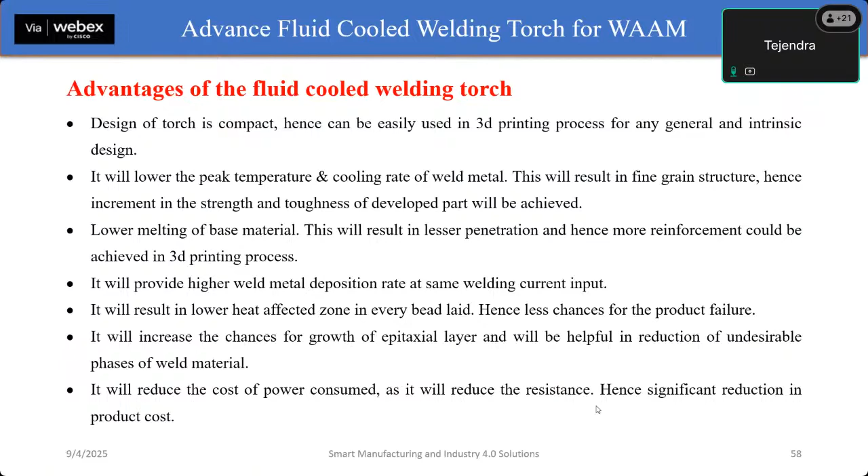It will provide a higher weld metal deposition rate at the same welding current input. It will result in a lower heat affected zone, hence less chance of failure of the weldment. It also reduces the cost of power consumed, as it reduces the resistance. We are going to discuss this in our further slides.

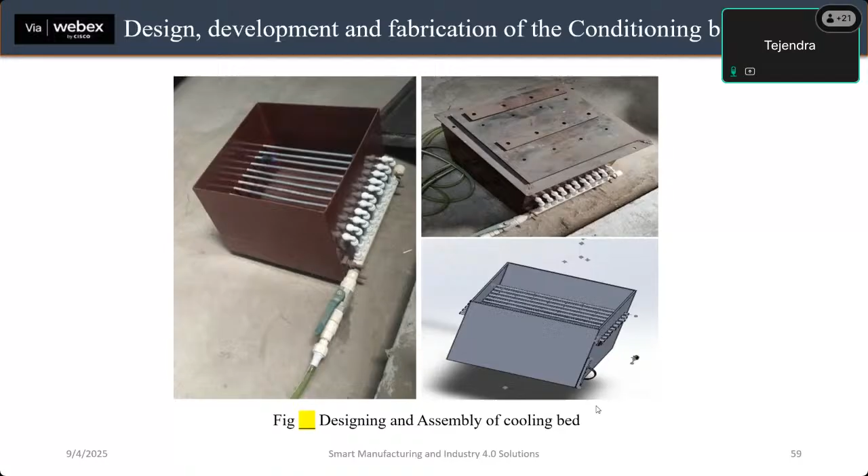Once we are done with the fluid cooled nozzle, we have prepared a cooling bed. This is the basic design and assembly of the cooling bed. Once we prepared the cooling bed, we performed a transient analysis simulation on it.

It takes around 17 seconds to get the temperature from 1650 degrees to 104 degrees. This means the heat conduction through this bed is good, and because of the high heat conduction, the fluidity of the material can be controlled.

So what is a cooling bed? A cooling bed is a cubical shaped environmental conditioning bed designed for metal 3D printing. More specifically, it provides a stable structure for the 3D printing material and also facilitates easy cooling of the base plate. The cooling bed comprises different channels placed horizontally and parallel to the top plate. These channels feature holes on the top surface so that water can be sprinkled on the top plate during 3D printing.

The interpass temperature can be maintained consistently, which is a very crucial requirement of a WAAM process, and the time consumed while the extruded material reaches its temperature is considerably wasted - this is called dwell time. Thus, the cooling bed helps conduct the temperature rapidly and uniformly, reducing dwell time and minimizing defects like warping or distortion. Additionally, the cooling plate swiftly conducts heat away from the extruded material, decreasing fluidity. This results in a smaller weld bead, and more reinforcement.

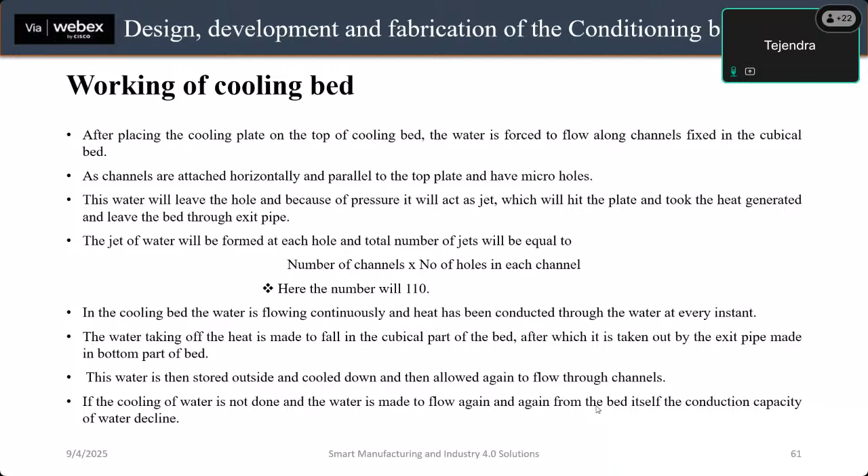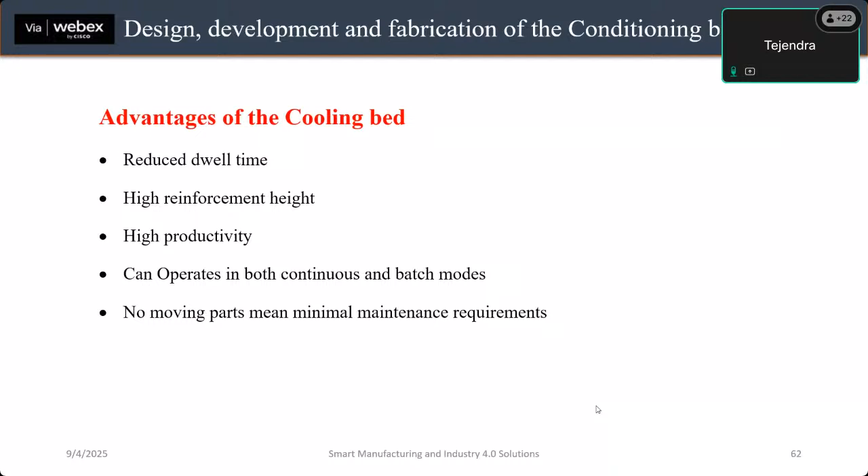Once the cooling bed was formed, we also modified the powder feeder that was taken or bought from the market.

In operation, the feed screw rotates at a constant speed in the powder feeder, delivering a consistent flow of the welding powder from the hopper to the metering mechanism. The metering mechanism regulates the flow of welding powder into the arc, ensuring a consistent flow rate. This directed flow produces a high quality weld.

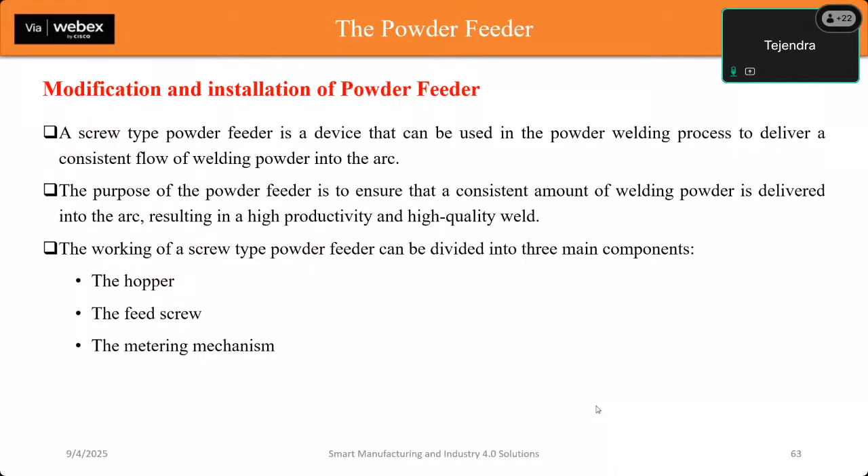The screw type powder feeder offers several advantages over different types of powder feeders, including improved accuracy and consistency, reduced maintenance, and increased efficiency. This is the basic structure of the powder feeder that we have used. So the study investigated the influence of the advanced welding process parameters, with the use of powder.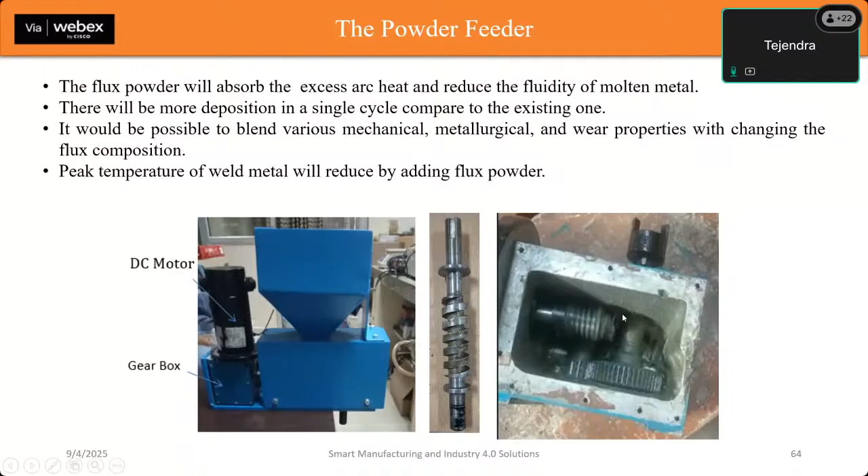This was the exterior portion of the powder feeder. This was the screw that we used to feed the powder from the hopper to the nozzle, and this was the gear train that is used to move the screw.

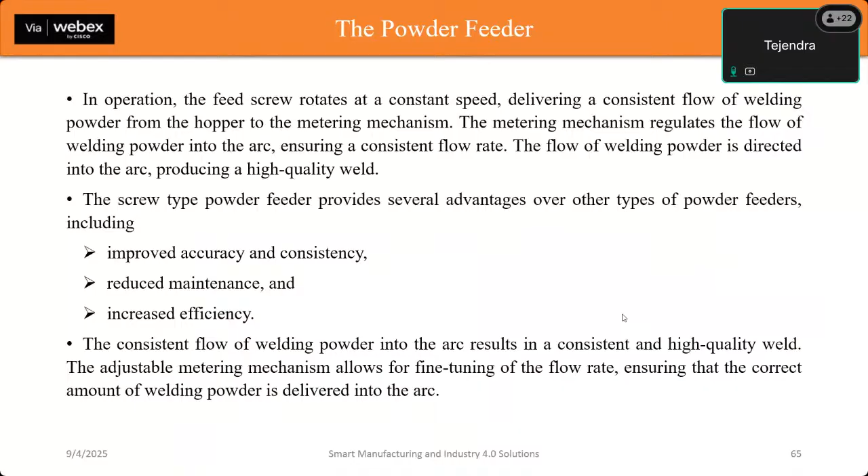Basically, in the operation of the powder feeder, the feed screw rotates at a constant speed, delivering a consistent flow of welding powder from the hopper to the metering mechanism. The screw type powder feeder provides several advantages we have already discussed, and it provides a consistent flow.

Also, when we are using the powder, we have checked and experimented that the amount of powder and the amount of wire should be equal for the maximum efficiency of deposition, and for defect free deposition.

We have tested the wire feed rate, the speed at which the wire is melting, as well as the current that is being fed for a particular wire feed rate, and the deposition that we are getting.

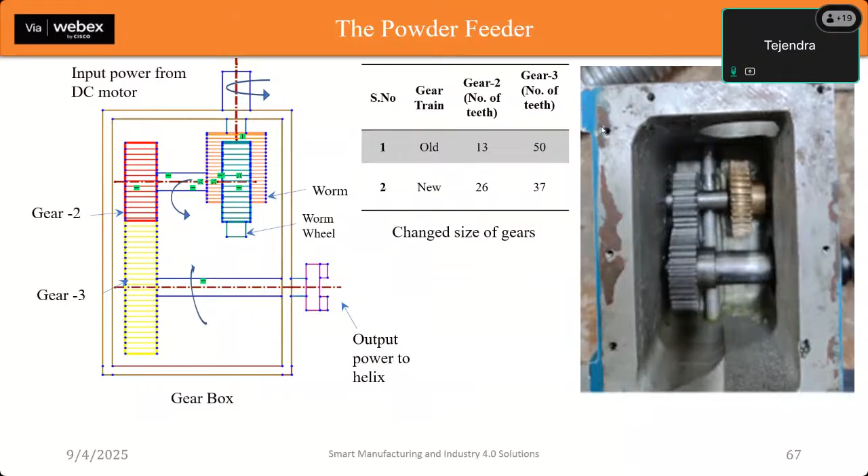These were the gears that we use. These were the gear train that we use for our powder feeder.

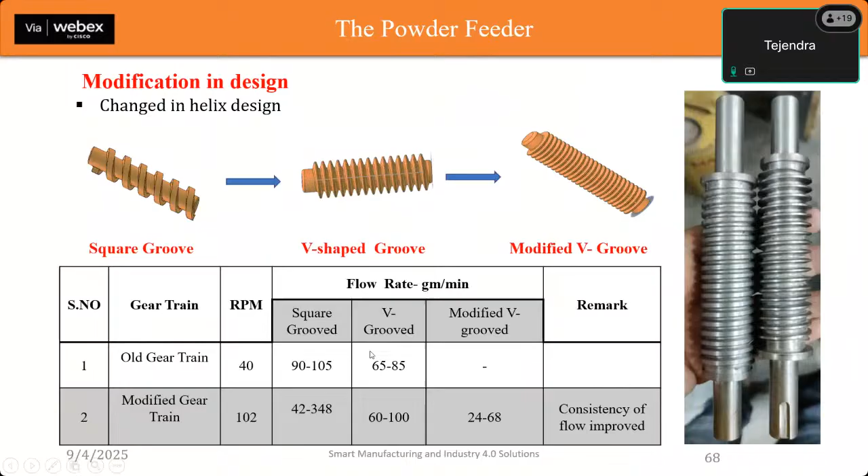In the below table, we have also shown the flow rate in grams per minute, so that we can assure the consistent flow of the powder.

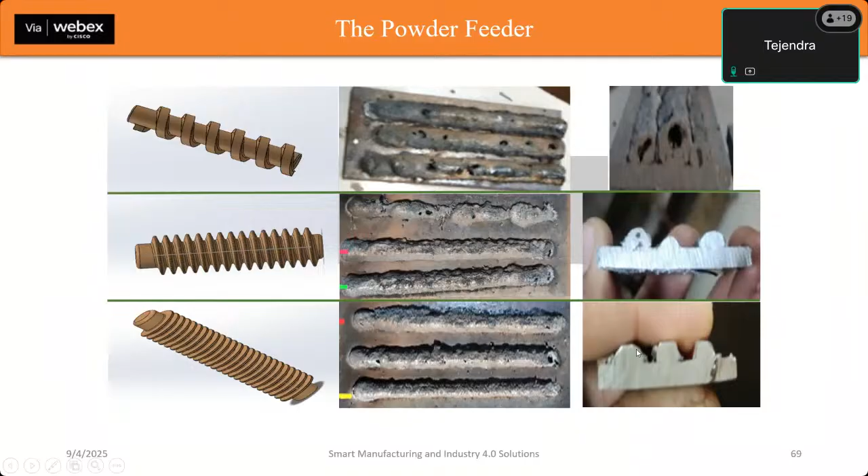As failures are a required part of the experiment, they provide us a good insight into the experiment. So some of the failures that I have shown are with different types of screws, and in the end, we have achieved a good surface finish, a good weld bead with the help of the powder feeder.

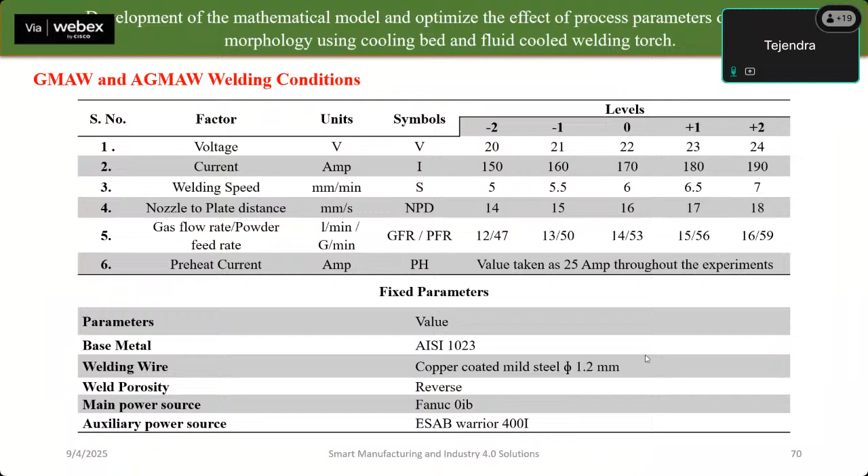These are some of the process parameters that we used for our 3D printing, and for the mathematical modeling. For the development of the mathematical modeling, these are the weld beads.

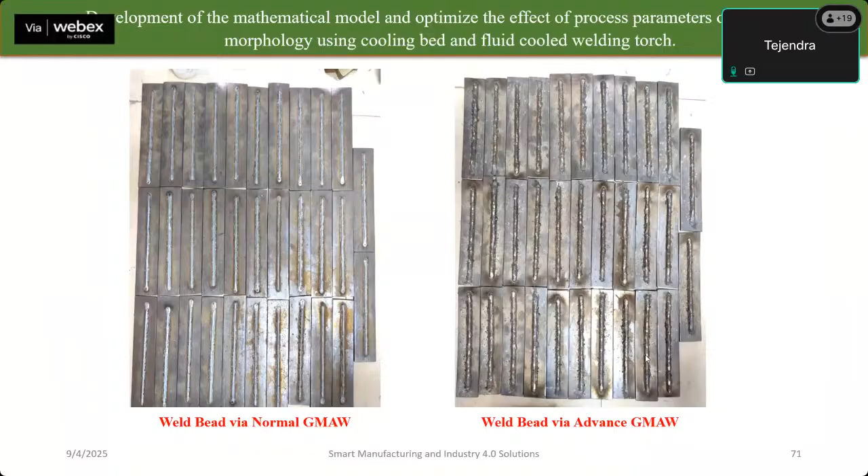Also, the interesting thing about this process is the economics of the advanced process. What is the economics of the advanced process?

In the context of the GMAW process, the significance of electric power consumption cost becomes pronounced when substantial welding is required for a specific task. The electric power consumption cost of GMAW is initially dependent on factors such as the welding current, the welding voltage, the welding time, and the cost of power per kilowatt hour.

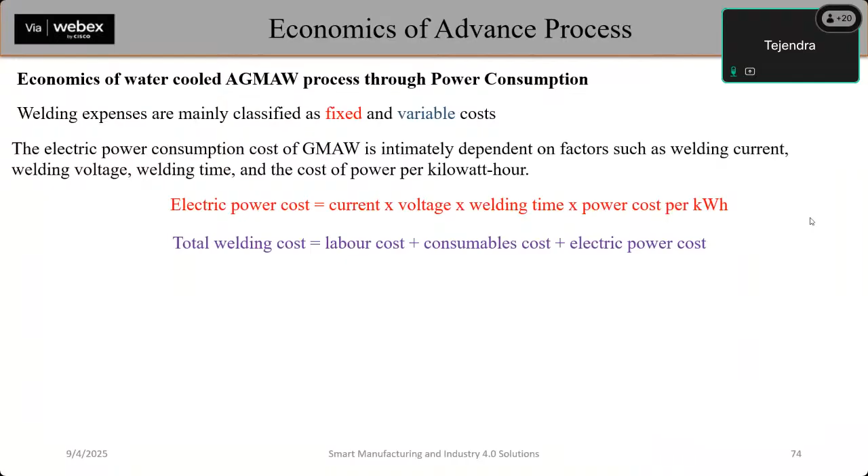So experimental trials were done to compare the electric power usage between the GMAW and the AGMAW process. Both welding processes utilize input parameters for the primary welding power with a voltage of 24 volts and a current of 190 amperes.

However, for the advanced gas metal arc welding process that we have used for the WAM process, three alternative parameter sets were applied. For set 1, the auxiliary power source was set to 0, with voltage and current replicating the normal GMAW method. In set 2, the voltage was set to 2 volts and the current was set to 25 amperes. And in set 3, a voltage of 2 volts and a current of 40 amperes were used.

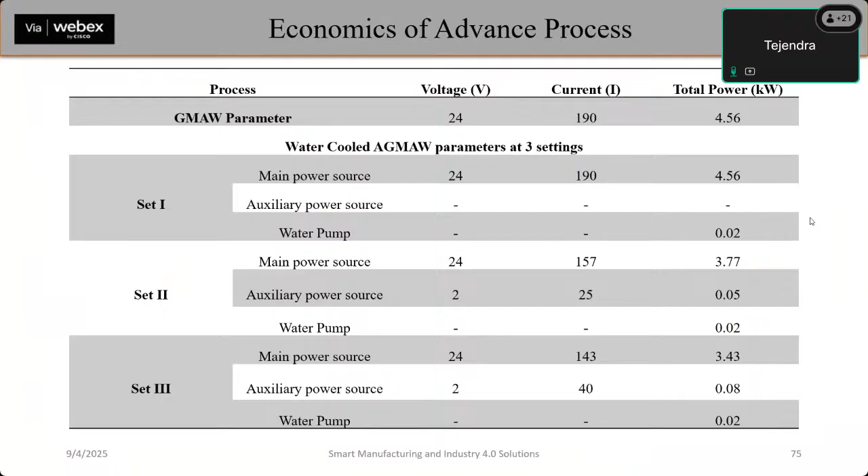The observation indicates that during the water cooled advanced process, there was a significant decrease in the welding current from the primary power source where the preheating of the wire begins. In set 2, the current in the main power source diminished to 157 amperes, and in set 3, the current from the main power source decreased to 143 amperes.

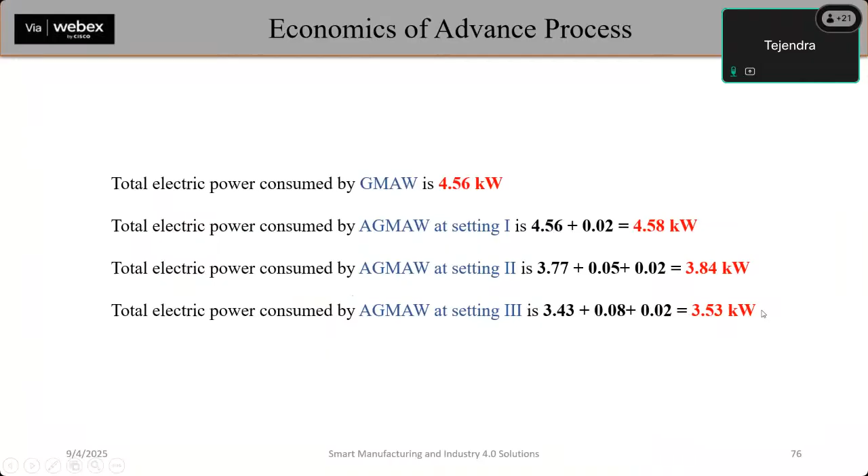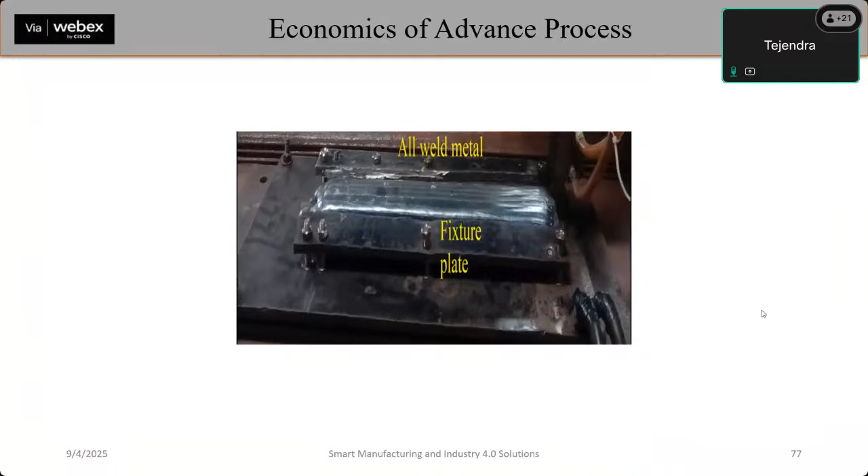So this was the metal 3D printed part that we have developed, generated through our advanced process. Thank you. If there are any concerns or queries, I am ready to answer them.